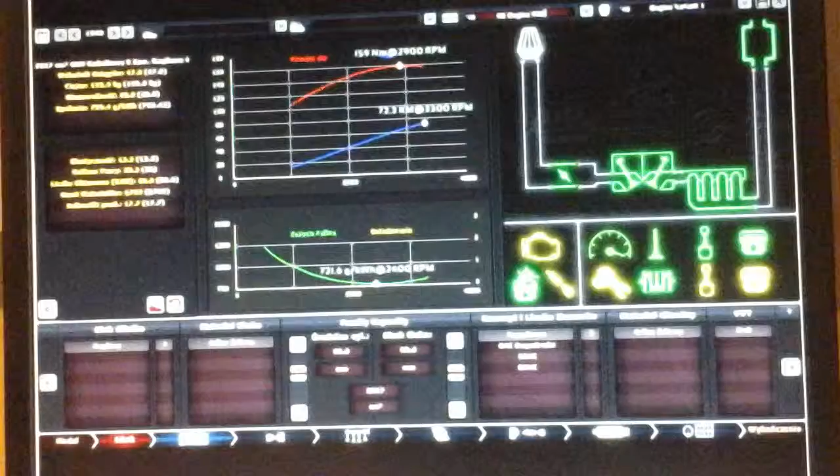It's the fifth engine designed on the Let's Design a Car Together thread series. Well, more like 2/3 of it, because the engine was supposed to be an inline-6, but in the demo version I can't have an inline-6, at least not in the time period, which I chose to be 1940 because I can't have 1937, in which year the thread takes place. So we've got a 1940 engine, an i4 instead of an i6.

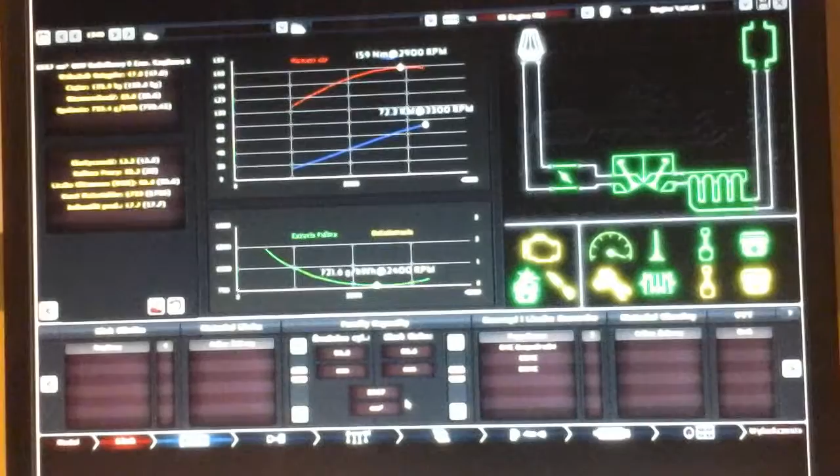But let's go into the details. It's got a cast iron block, 2.66 liters. The original one was supposed to be a 4.0, but 2.66 is 2/3 of 4.0, and as the engine is 2/3 of the N96, its displacement should be 2/3 of the N96 displacement.

And the valve train is a pushrod one, an OHV one. It's got cast iron heads in here. The actual engine would have aluminum heads, but unfortunately those ones are cast iron because there is nothing better in the game.

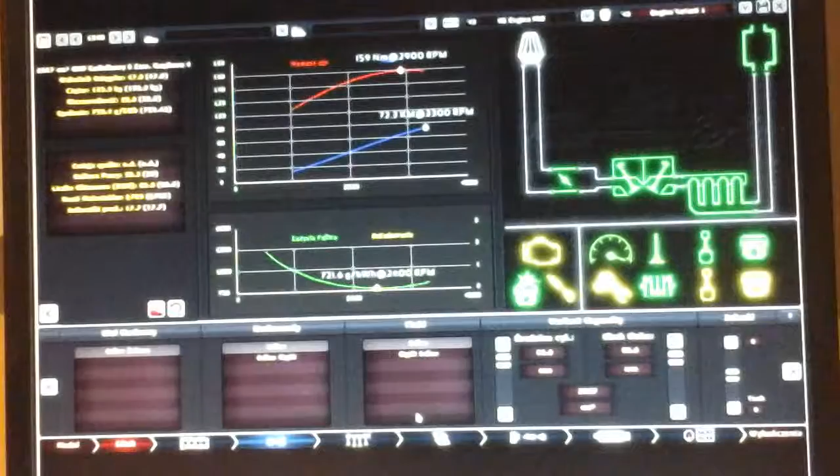There is no VVT, of course. A cast iron crankshaft, cast iron conrods, and cast iron pistons. We've got very low compression because the engine runs on 86 octane fuel.

Pretty average cam profile. What comes? Oh crap! My camera mount just gave way. That's okay, we'll do it by hand.

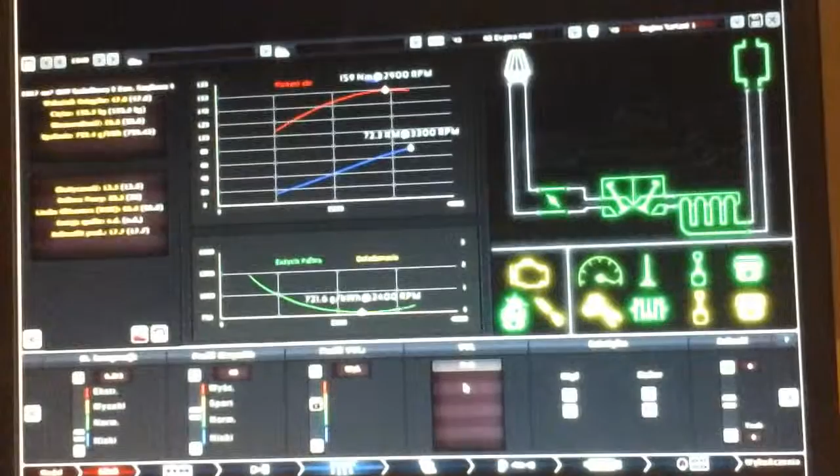So we've got no VVL, of course, no turbo, a twin barrel carburetor, twin carburetor with a standard intake, which is surprising because the car is a race car.

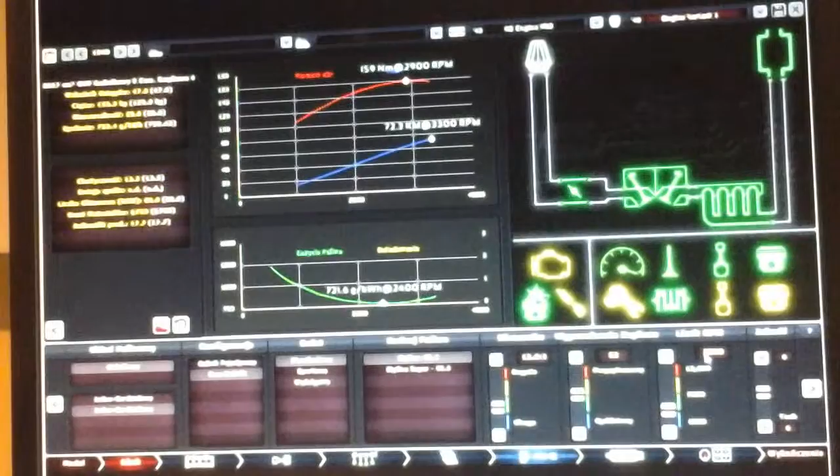We've got pretty average fuel mixture and ignition timing, and it revs up to 3300 RPM. Then we have a tubular exhaust with a single exhaust and no bypass valves because there are no bypass valves in the 30s, and a 1.5-inch exhaust.

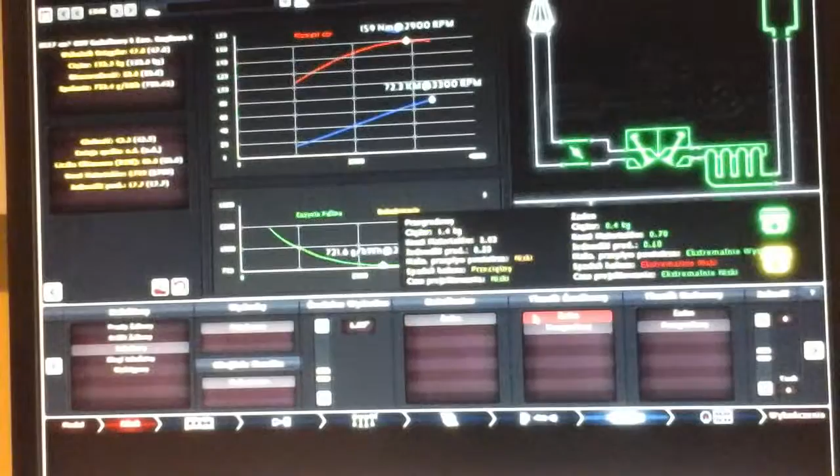It's got no emission control, of course, but it's got standard mufflers.

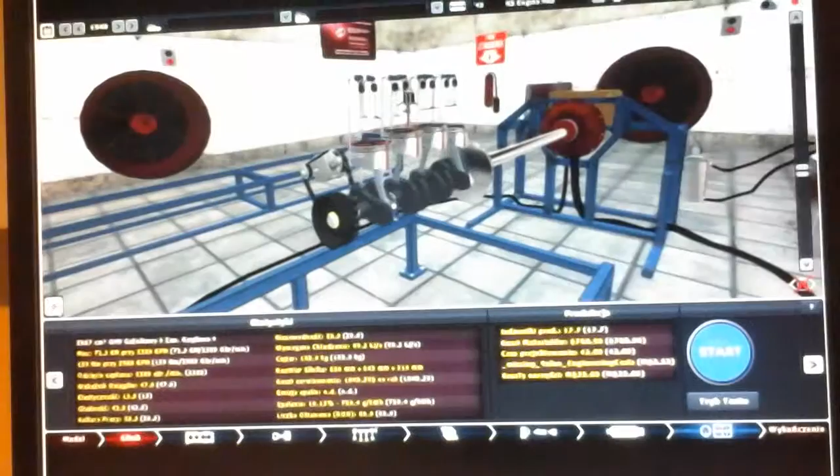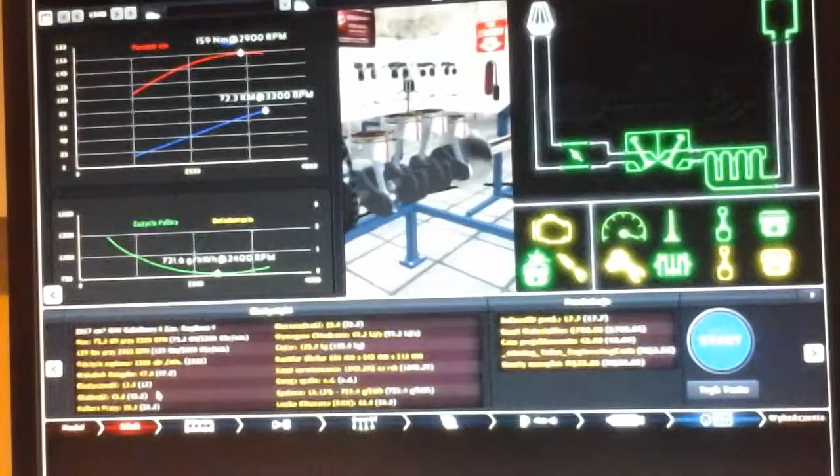It's got quite good performance, but it is unfortunately not too responsive, though it's not too loud, and it works quite nice and is quite reliable for a racing engine. It doesn't need a lot of cooling, but is heavy and quite long, which will be a problem in a rear engine car like the one we have.

But now let's listen. Closer and put the volume up. Right, and power. Oh, the sound file just went out.

So we start out at 1400 RPM, 2000, 3000 and 3300. Now I want to show it with my voice.

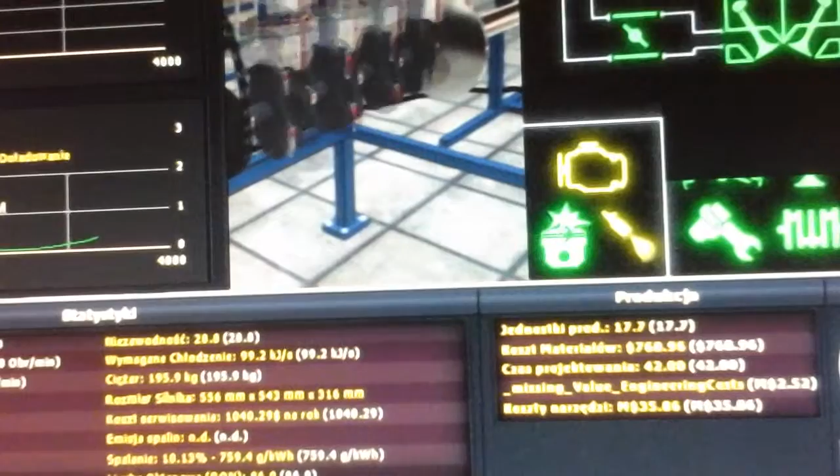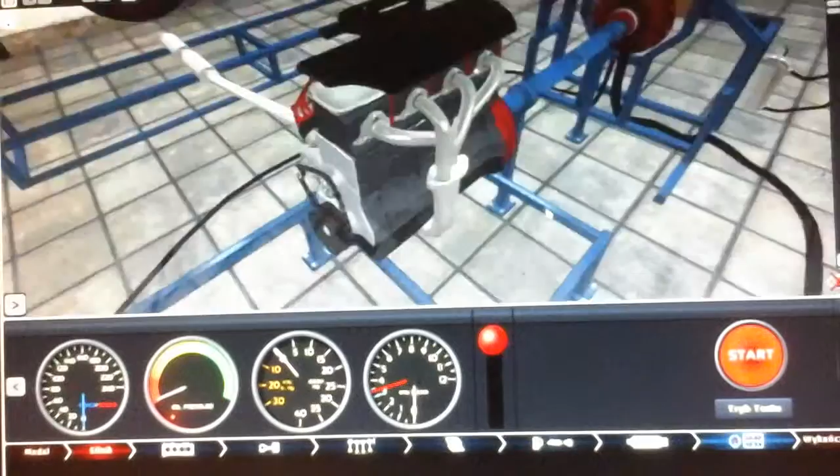Now, when we go to the technical data, it'll show you the engine in its full unobscured glory. Here it is. It's not too impressive, but hey, it does the job.

And let's get a final listen to it. Top revs, minimum revs, barely audible, maybe if I bring the volume to a realistic level. The lowest, oh, the 1400 wasn't the idle, the idle is 1000. 1700, 2200, 3 grand, 3300. The oil pressure gauge is passing out and the warning light blinks now and then.

Oh, it actually doesn't, but it is very quiet. A quiet entry in a race car. And on that bombshell, we're going to end. Good. For me it's night.